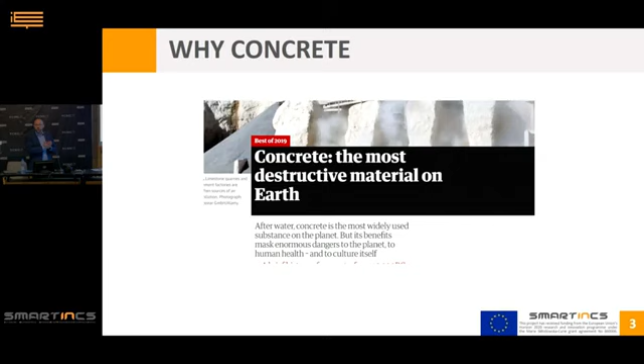Now back to our presentation. So, a couple of slides with data that you already know very well, so I'm not going to present the same data about how polluting concrete is, but I don't know if you ever came across this article in the Guardian last year. Concrete is the most destructive material on earth. So in terms of publicity, we all work with concrete. If that article is read by someone that doesn't know anything about concrete, the general public, that's what they come across. Why? Because of the production of concrete at the minute, the latest data from 2020, 4.1 billion tons. And obviously we know cement production contributes approximately 8% of anthropogenic CO2 emissions.

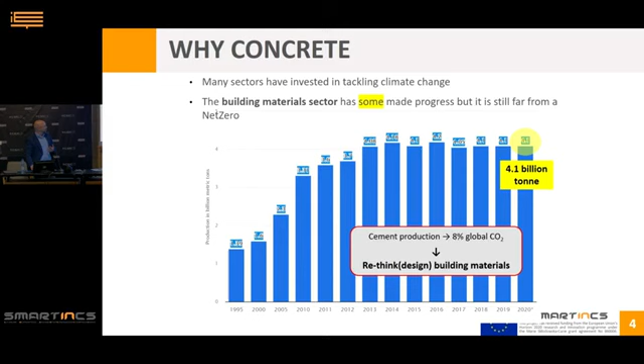So there is a need, which is called the net zero agenda, carbon agenda, which we all know about, I hope. But what's interesting is this change in policy and net zero and carbon agenda is not only within the concrete industry, but there are also other industries we probably didn't think of that are thinking of switching to carbon negative. Companies like Sky News, Microsoft as well. Microsoft, we can understand why, but why does Sky News want to be carbon negative? What do they actually produce in terms of CO2 emission? And obviously to assess their carbon emission, each company uses some tools. And one of the most used tools is actually life cycle assessment.

So before we dive into life cycle assessment, just to recap some of the principles in terms of sustainability, one of the most known principles is the 4 Rs: reduce, reuse, recycle, and restore. If we think about that principle within the construction industry, that means, for example, demolition versus repair, assessing whether we need to demolish a structure. Can we do something with the structure? Can it still be repaired and be used for something else?

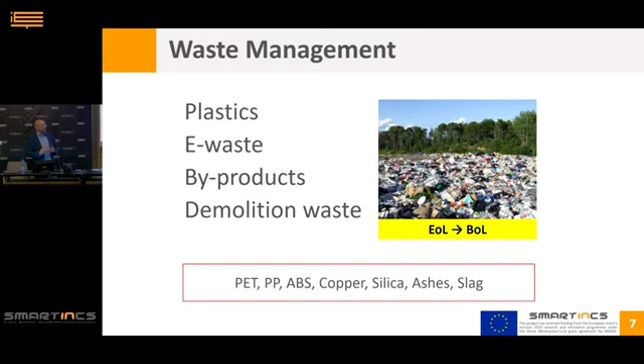Or indeed reuse the demolition waste and change the perspective from EOL to BOL, end of life to beginning of life. So using something that is discarded as a material that actually can be used to start something new, something different. Or looking at completely different materials. Self-healing materials is one of them. Looking at agricultural waste, alkali activated materials as pozzolanic materials.

And finally, looking at durability, which is what from the previous discussion I will carry over during the talk, about assessing the durability and how this is important. I really like the triangle that Esteban pointed out, where durability is the least aspect that you are able to demonstrate, convince, or to use in commercializing your ideas.

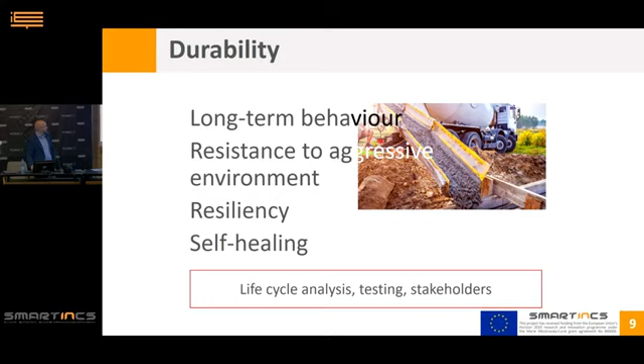So, building cycle. This is not something new to you, but I thought I'd put it there just to start talking about life cycle assessment. So, in a life cycle assessment, if we have a product, a material, a process or service, we need to think about starting with the extraction of the raw material, assessing what materials we need, the manufacturing of those materials, their construction, operation and maintenance, and then the end of life, demolition, and what do we do with these materials? After they are demolished, we store them safely, we dispose them into landfill, or we reuse them.

There is a really nice, useful book. It's called Life Cycle Assessment in the Built Environment from Crawford, and that has been my Bible for quite a while. But what is interesting, and that's why I mentioned Sky News earlier, a life cycle assessment tool is not only for a product, it's not only for self-healing concretes, but life cycle assessment can be used also to assess the environmental impacts of a service that we offer, or also of a process. So it's used for product, process, and services.

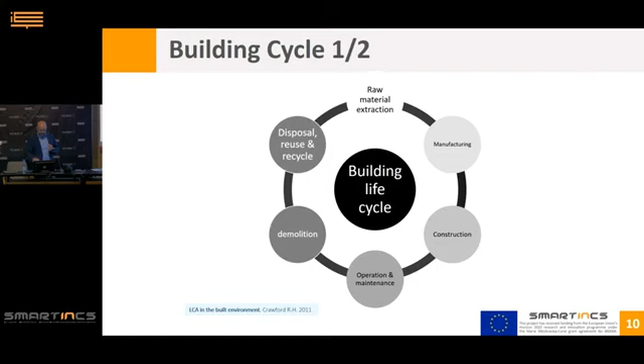Embedding life cycle assessment means implementing some of the strategies, such as reuse, design for disassembly, design for recyclability, design for durability. They all have some environmental benefits, which are preservation of natural resources, reducing waste production, minimization of land use, and so on.

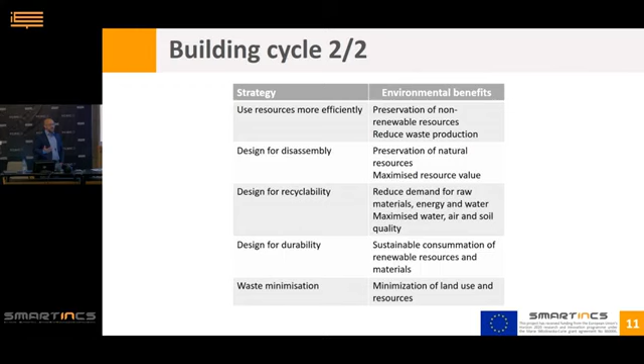So, what is life cycle assessment? I've taken the definition directly from the regulation, which is the ISO 14040:2006, and it is a compilation and evaluation of inputs, outputs, and potential environmental impacts of a product system through its life cycle. Also, the regulation says the life cycle assessment can assist in identifying opportunities to improve your environmental performance.

And that's really important because usually, academically speaking, we got this fantastic idea, we have this new self-healing concrete, this technology, we do all the experiments in the lab, and then the last chapter of our paper, the last chapter of our PhD, is a life cycle assessment. Let's dedicate a couple of weeks and build a life cycle assessment. And then we end up with some rubbish data because we didn't think that some of the technologies we were using are actually very polluting, emitting lots of environmental emissions.

So you should start your research with a life cycle assessment, because then you can identify what processes in the production of your concrete are actually releasing environmental emissions, and then rethink that process and recalculate your life cycle assessment. And it can also be used for informing decision makers. And that's a point, again, that I take over from the last talk.

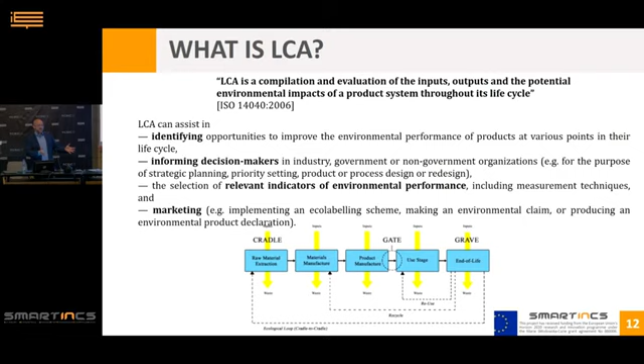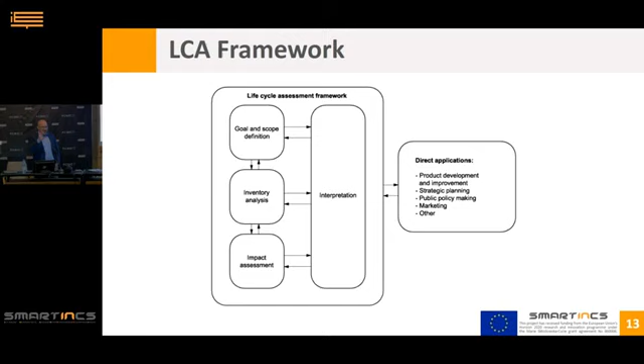So, there will be a test at the end of the lecture, so make your notes. The four main elements of an LCA, as stated in the international standards, are compulsory. You need to have goal and scope definition, inventory analysis, impact assessment, and interpretation. Let's quickly analyze the four of them.

So, goal and scope. We need to understand what it is that we are doing with our LCA. Are we doing the LCA calculation to actually verify the process, or are we doing it to convince our audience? And also, who is your audience? Who's going to buy? Is it the general public? Is it a government body? And then the scope. And this is something really tricky, and I'll show you in a minute why.

We need to compare like for like. So when we do a life cycle assessment, choosing the functional unit is really important. And the functional unit is not necessarily a beam, so the production of one beam of concrete. It's not necessarily 1 cubic meter of concrete. A couple of examples to let you understand what a functional unit is.

I want to do a life cycle assessment of a conventional car, like a petrol car, and an electric car. What will be my functional unit? I'm asking the audience. There is no wrong, well, there is a wrong answer, but don't be shy. So, life cycle assessment to compare a petrol or a diesel car with an electric car.

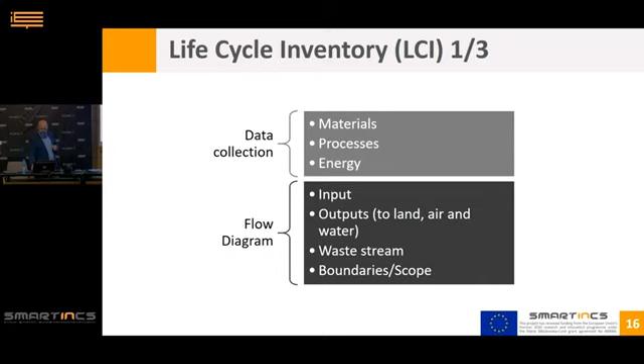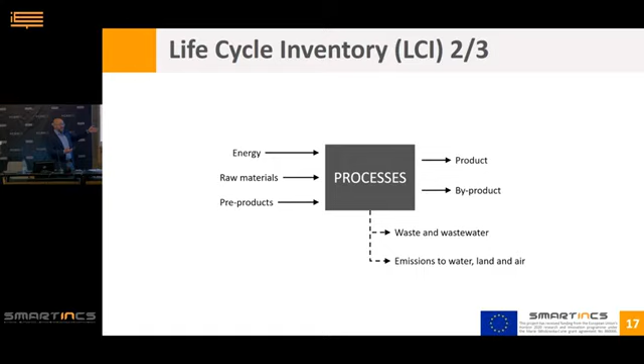For example, transportation of concrete as a process. My input will be cement, sand, aggregate, water, the energy for mixing, and the transportation factor. The output will be the final product, transported concrete. Secondary outputs are any waste.

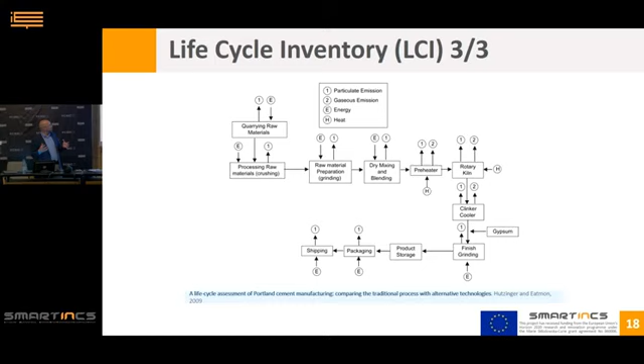Weighting and normalization. It means, based on the environmental factors, which one we give more weight to, and how do we normalize? Do we normalize by population? Do we normalize by impact to the environment? And then we choose the categories, which are indicators and factors, the impact categories that we want to look at.

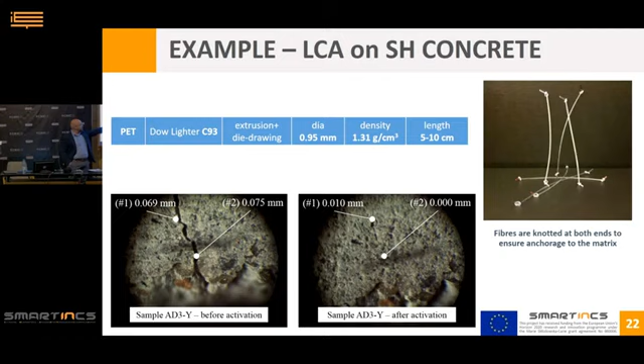So I'll give you an example of a life cycle assessment that we did on a piece of our work. This is a self-healing concrete using shape memory polymers. So tiny fibers, knotted and mixed in concrete. And you can see the effect of these shape memory polymers. They are able to fully close those cracks.

So what we did was, first of all, comparing the production of 1 cubic meter of conventional concrete and 1 cubic meter of KSMP, knotted shape memory polymer fiber concrete. So we put a lot of assumptions there because we were interested in other components, which you will see. So we broke down the two scenarios.

So conventional concrete: the first unit is concrete production. My inputs were water, sand, aggregates, and cement. Output was concrete. The second process was the transportation of this concrete. So my input was the concrete from the unit before and the transportation. Output, the transported concrete. Easy peasy.

Let's move on to the self-healing concrete. We need to start from the shape memory polymers. These shape memory polymers we buy in the form of PET granulates. How those PET granulates are made, I don't know. I decided to put my system boundaries there. So I acquire my PET granulates, I include the transportation. My output is the transported PET granulates.

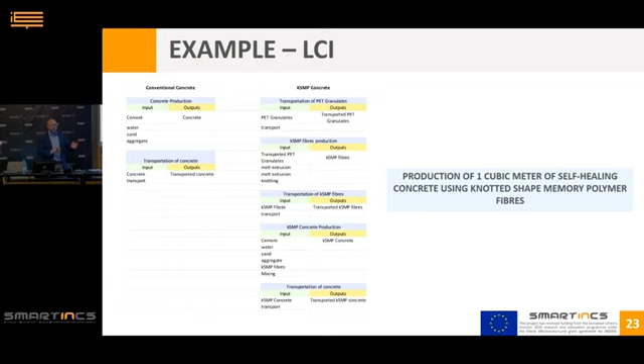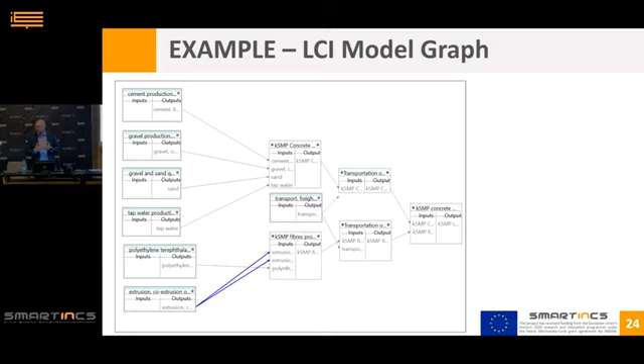So this is the model graph that comes from the software that we use for LCA, where you can see exactly what I've done on Excel. The inputs, the outputs; some of the inputs are already parts. You gather that information from the database that we use. In this case, we use EcoInvent. And then we did the impact assessment, which takes only a couple of minutes on the software. But gathering all the information for the life cycle inventory is what takes the majority of your time and patience.

So let's look at the global warming potential, the kilogram of CO2 equivalent, in conventional concrete and KSMP concrete. Transportation, again in green, is the highest component for both of them. In fact, it is actually almost the same. In conventional concrete and the KSMP concrete, the amount of cement is the same. We didn't replace the cement, we partially replaced the aggregates with KSMP fibers. But in total, the KSMP concrete has a higher impact in terms of global warming. And that's due to the production of PET, the PET extrusion.

If we look at it the other way around, where we want to know which impacts are most affected in comparing conventional concrete and KSMP concrete, we can see on the graph on the right-hand side that human toxicity and abiotic depletion are the impact categories that are higher, and there is even a new impact category that you don't have in the conventional concrete, simply because you don't have the production of plastic.

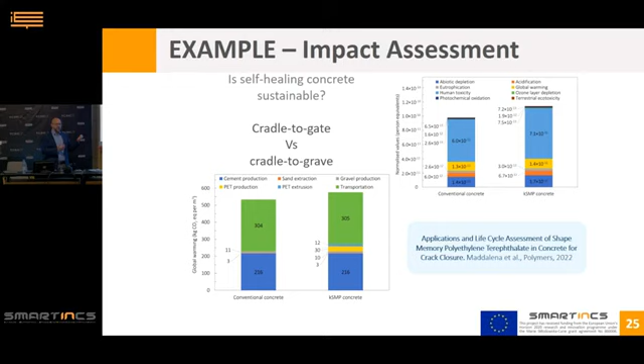So we go back to our production, and we understand that in order to lower the KSMP concrete emissions, we need to look at transportation, try to minimize the transportation, and try to understand how we can source raw materials locally. Replace the clinker, the Portland cement, with other sustainable options. What can we do about the PET production, the yellow one here? Is there any way I can minimize that?

Recycled plastic. Bear in mind though that whilst recycled PET granulates are available everywhere, their purity is not as good as virgin PET granulates, especially for the shape memory effect that the extrusion process gives to these fibers.

So what we are doing now, thanks to the LCA, we are trying to go back to the lab and replace 30% of the PET granulates with recycled ones and see whether we have the same shape memory effect that is able to close the crack. Also, this model is a cradle to gate analysis.

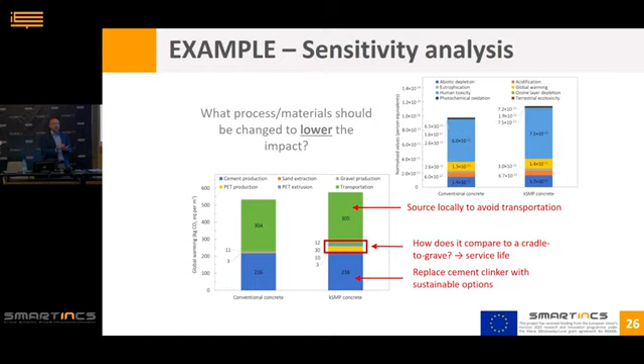replace a concrete cover. If I have the information and I know with the self-healing concrete that doesn't happen, I can move then from a life cycle assessment cradle to gate to a cradle to grave, because I have information on the service life and the durability that will allow me to take that into consideration.

So, current projects I'm working on and we at Cardiff are working on: obviously development of self-healing materials. We're using now LC3 cements. We're working on a new plastic reinforcement to get rid of steel in concrete, as well as using mineral waste and waste foundry sand in concrete. And for each of these projects, we always do a life cycle assessment in parallel.

Some of these projects, we didn't even start yet. For example, the last one, Enhanced Carbon Negative Supplementary Cementitious Materials, is a collaboration with a company in Canada. We haven't even started the actual experiments because what we're doing at the moment with our students is doing a life cycle assessment first. Try to understand what their process is.

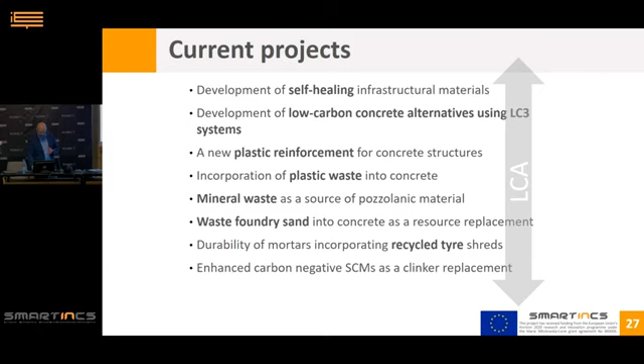And just to say, because I'm very proud of that, obviously to understand the service life of any innovative material, any material that hasn't got any regulation, you need durability testing. You need to simulate what will happen to that structure in 100 years. And we recently in Cardiff got this new lab, funded by the Welsh government, which we call a time capsule, where you can simulate aging of any material, bonds, metals, plastic, concrete, and infrastructure materials.

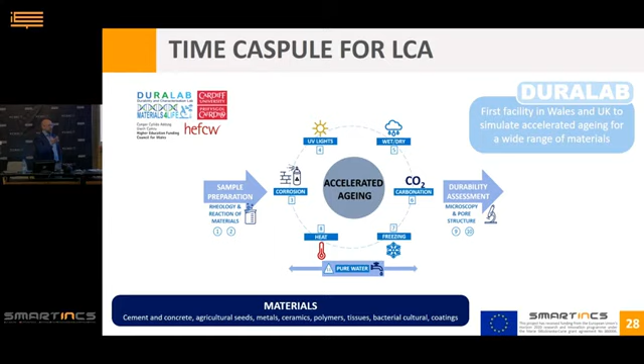And you can simultaneously simulate corrosion, UV exposure, wet and dry carbonation, along with freezing and thawing, along with mechanical loading. So simultaneously you can get information about any aggressive environmental condition in weeks that could replicate the exposure to hundreds of years.

Now, we've got a few minutes. I'd like to have a volunteer to do a very basic life cycle assessment on their project. That would be cheating though. Yeah, okay. You can come here, or you can stay there. I just need you to explain what your project is and try to break it down into processes.

So I'm working on repair mortars. So that will be the end product. A mortar which will have cement, sand, possibly capsules. So in terms of process, I think I will start not with the cement extraction, but just with the cement, because I will probably take the cement from other companies.

Okay. So my first will be transportation of the raw materials from the manufacturers, cement and sand, to my batch mixing place where the big mixing machinery is going to run. So the first thing will be the transportation, then the mixing process, and putting them in bags. That will also include the production of the final bags, and then sending it to either contractors or the suppliers. So those will be my different processes.